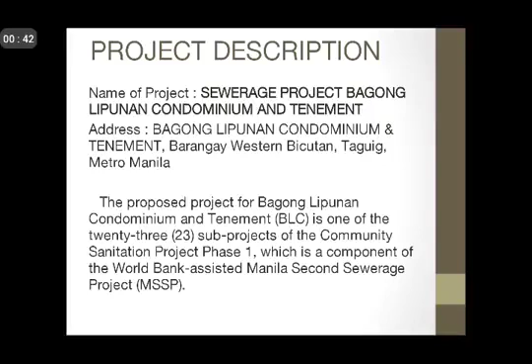The proposed project for Bagong Lipunan Condominium and Tenement, or BLC, is one of the 23 sub-projects of the Community Sanitation Project Phase 1, which is a component of the World Bank-assisted Manila Second Sewerage Project, or MSSP.

The project is intended to reduce the current wastewater pollution discharge to the Laguna Lake by the 1,213 residential units in BLC. The project involves the improvement and rehabilitation of the sewerage system in the compound.

Specifically, the project includes the installation of sewer lines to intercept sewage flows from existing communal septic tanks, as well as raw wastewater flows from buildings without septic tanks.

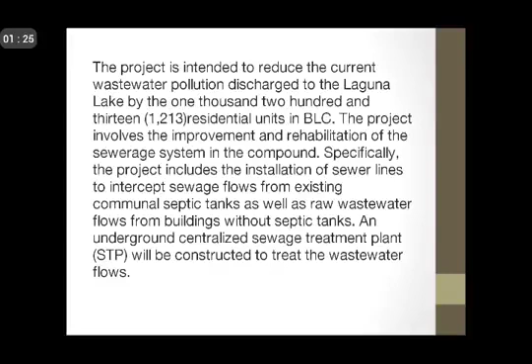Scope. This project specifically aims to address the problems of inadequate wastewater treatment and disposal in BLC. The project will help reduce public health risks and environmental pollution from untreated or partially treated domestic wastewater by providing

a sustainable sanitation and sewerage facility. It will also serve as a good illustration of proper sanitation, especially to the neighboring communities near Laguna Lake.

These are the parameters that will be considered: pH, suspended solids, dissolved oxygen, biochemical oxygen demand, chemical oxygen demand, total coliform count, and fecal coliform count.

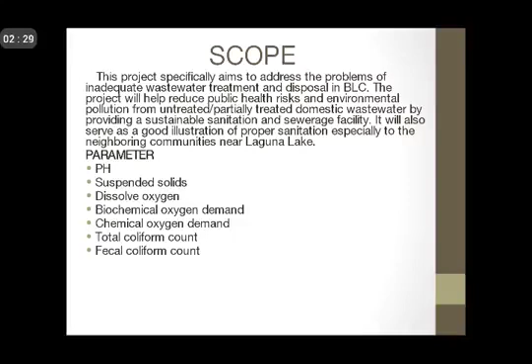Environmental monitoring plan. Parameters under construction phase. Compliance with Manila Water Company health and safety policies includes dust emissions, good housekeeping, noise, and others. Location: STP site and its perimeter.

Pipe laying area, equipment and material storage area. Frequency: on-the-spot daily inspection and monitoring will be implemented by the Health and Safety Department of Manila Water Company using the STARRT card or Annex 1.

The second parameter under construction phase is traffic. Location: ingress and egress to the construction site. Frequency: daily. These are the parameters under operational phase.

Effluent water quality for parameters like pH, 5-day BOD, COD, total coliform, suspended solids, oil, and grease. Location: influent, samples from treatment stage. Effluent. Frequency: Annex 2 describes in detail the schedule of wastewater quality monitoring.

The second parameter under operational phase is odor. Location: STP site and perimeter. Frequency: daily. And the last one is sludge accumulation or clogging.

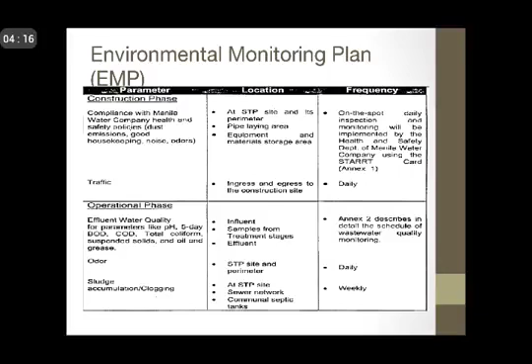Impact and its mitigating measures. Poor quality construction. Manila Water Company will monitor the supply and installation contract to assure quality of equipment and construction.

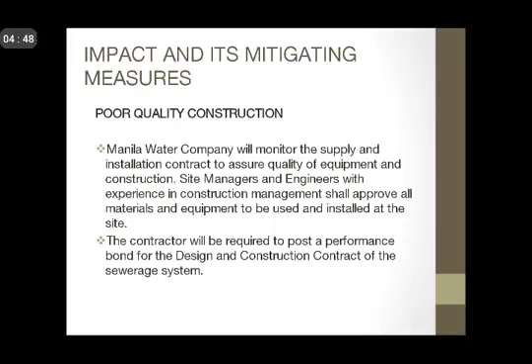Site managers and engineers with experience in construction management shall approve all materials and equipment to be used and installed at the site. The contractor will be required to post a performance bond for the design and construction contract of the sewerage system. Air pollution.

Efficient construction planning and work scheduling. Prompt and fast removal of excavated materials or dredges spoils from construction site. Sprinkling of water on dust-generating mounds resulting from earth-moving activities and civil works.

Water pollution due to wastewater. Provide temporary drain systems and storage facilities for excavation soils, fuels, oils needed for construction. Provision of routine chemical and oil spilling cleanup plan.

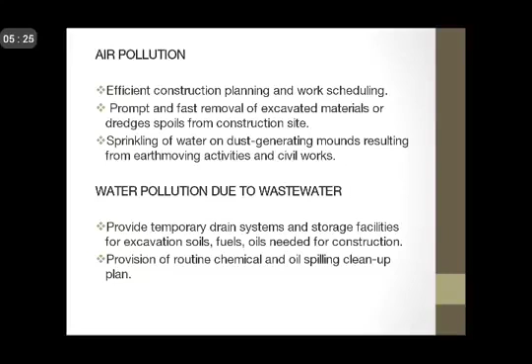Process. The project will be bid on the basis of performance specifications for the STP treatment process. Wastewater flows were computed on the basis of a per capita water demand of 200 liters per day and a 70% wastewater discharge. Storm infiltration was estimated at 10% of the total flows.

A peak factor of 1.5 was added in the computation of design flows to determine pipe sizes and capacity of STP.